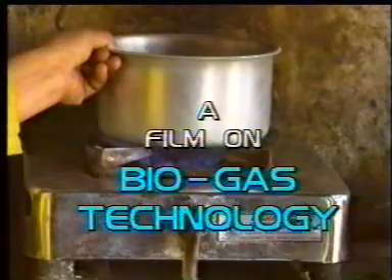With the rapid increase in population, there is a tremendous increase in the demand of energy resources to meet household needs in Indian villages. Still, about 60% of rural people depend upon traditional sources of energy, that is firewood, cow dung cakes, etc.

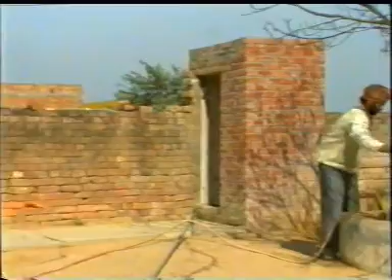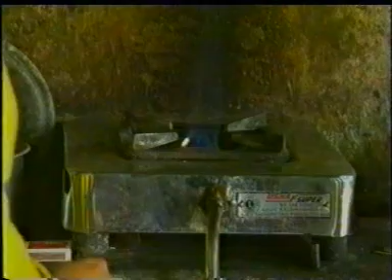Keeping in view the difficulties faced especially by rural women in meeting their energy demands, biogas technology can be an appropriate answer. Biogas technology helps us to generate biogas from biomass, that is cow dung, crop residues, etc., which are available in abundance in the rural areas.

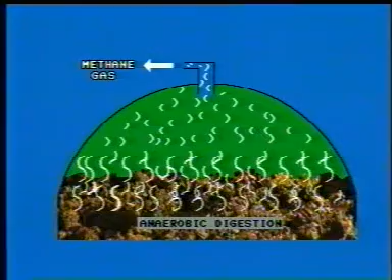Biogas is produced by anaerobic digestion. Anaerobic digestion is nothing but decomposition of cattle dung and other organic matters with the help of microorganisms in the absence of oxygen. Anaerobic digestion provides us methane gas for cooking, and in exchange of fresh-fed cow dung slurry in the plant, we get well-digested, valuable manure rich in nitrogen.

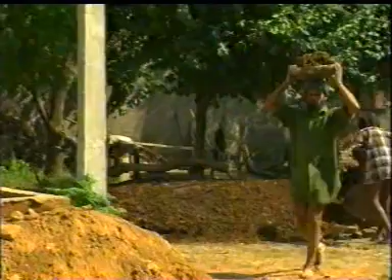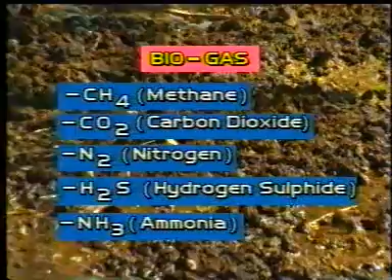What is biogas? Biogas is a mixture of methane, carbon dioxide, nitrogen, and some traces of gases like hydrogen sulfide, ammonia, and water vapor. Biogas can be utilized for cooking and lighting, running diesel pump sets, and the outcoming slurry as manure in the fields.

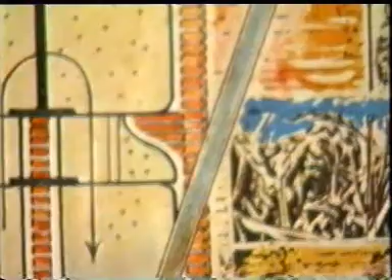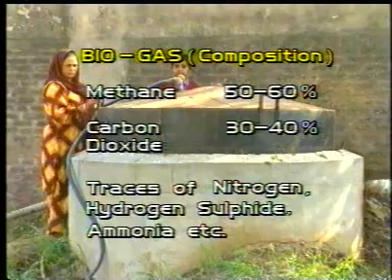On an average, biogas contains about 50 to 60% methane, 30 to 40% of carbon dioxide, and traces of nitrogen, hydrogen sulfide, and ammonia. The digestion of organic matters can be done in two ways: batch digestion or semi-wet process, and continuous or wet process.

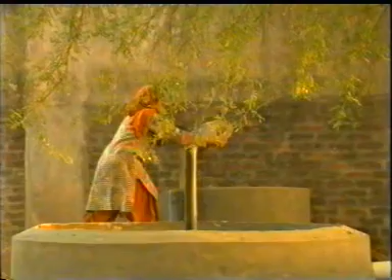Batch digestion. In the batch digestion process, the organic matters are filled in a suitable container along with some moisture. This container is then sealed to exclude air from it. The gas formation, which starts after 1 week, can be collected in centrally located gas holders and can be used for 30 to 40 days.

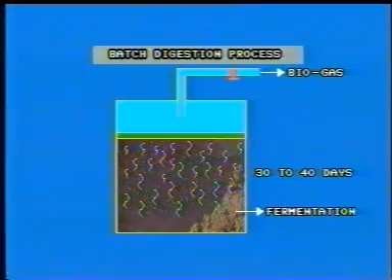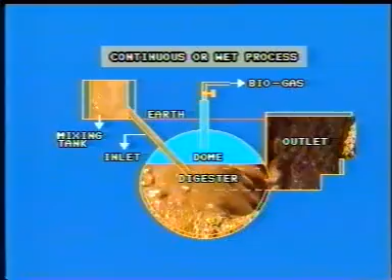Continuous process. In the continuous process, a single container serves as the digester. Each day, we add a required amount of fresh feed or slurry, and an equal amount of digested slurry comes out. It provides us gas continuously, and on the same principle, the biogas plants work.

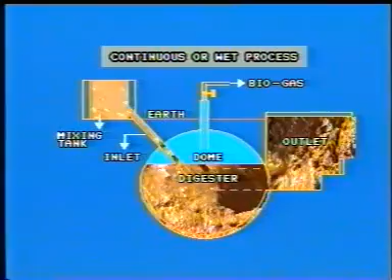Let us understand now what are the different factors that affect biodigestion: pH or hydrogen ion concentration, temperature, total solid content of the feed material, carbon-nitrogen ratio of the input material, retention time or rate of feeding, types of feedstock, stirring or agitation or mixing of the content of the digester, type of initial inoculum, and acid accumulation inside the digester. Now let us understand these factors one by one.

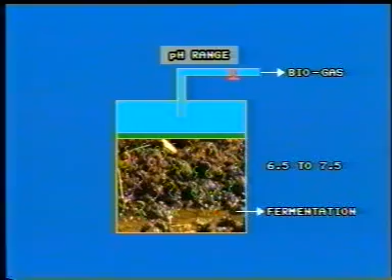pH or hydrogen ion concentration. The digester is usually buffered if the pH is maintained between 6.5 and 7.5. In this pH range, the microorganisms will be very active and biodigestion will be efficient. Temperature. The required temperature inside the digester for effective growth of microorganisms and biogas production is 20 degrees centigrade to 42 degrees centigrade.

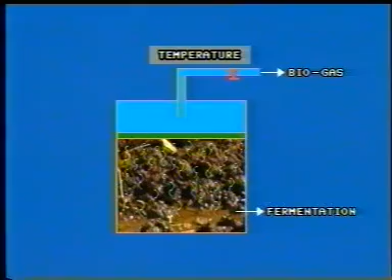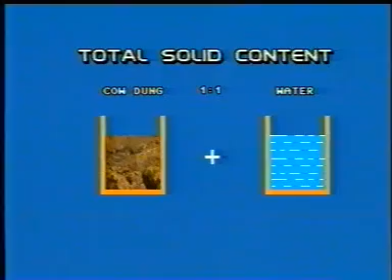Total solid content of the feed material. The cow dung is mixed with water, usually in the proportion of 1:1 by weight, to keep the total solid content about 8 to 10%. Carbon-nitrogen ratio of the input material. The optimum carbon-nitrogen ratio is 30:1 for the maximum microbial activity.

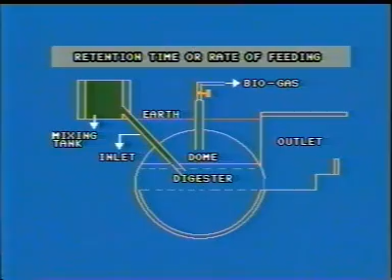Retention time or rate of feeding. The period of retention of organic matters inside the digester for complete digestion by the microorganisms is known as retention period. Retention periods for some of the feed materials are: cow and buffalo dung 50 days, night soil 30 days, pig dung 20 days, poultry droppings 20 days.

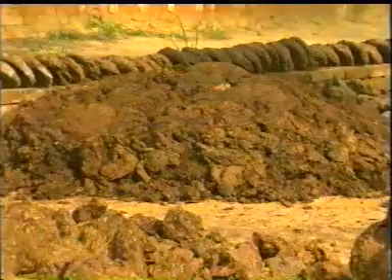Type of feedstock. All plant and animal wastes can form the feedstock for a digester. However, woody materials are avoided to keep the process of digestion smooth. Stirring or agitation or mixing. Breaking the scum or the mat formation at the top of the digester is necessary for enhancing gas generation.

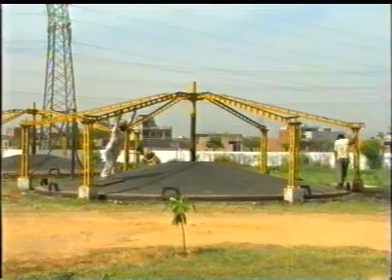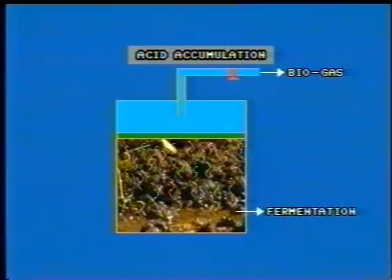Types of initial inoculum. The initial inoculum is the biodigested slurry collected from a well-established digester. It helps in providing sufficient number of microorganisms. Acid accumulation inside the digester. Some fresh plant matters added in excess may produce acids as intermediate products. Avoid adding excess fresh plant matters inside the digester.

Some of the family size biogas plants are the floating gas holder, commonly called KVIC type, with 1 to 10 cubic meter capacity, and the fixed dome, commonly called Janata type biogas plant, with 1 to 6 cubic meter capacity.

Pragati model with 1 to 8 cubic meter capacity. Modified fixed dome called Deenbandhu model with 1 to 6 cubic meter capacity. The KVIC plant has a digester made of prefabricated ferro cement. The KVIC plant also has a gas holder made of fiberglass reinforced plastic with a 1 to 6 cubic meter capacity.

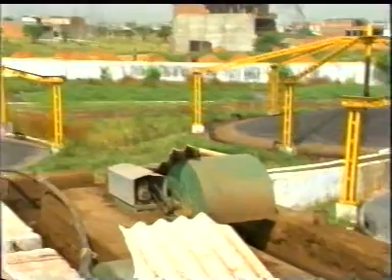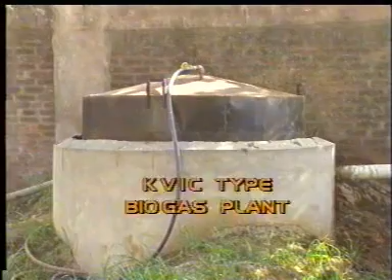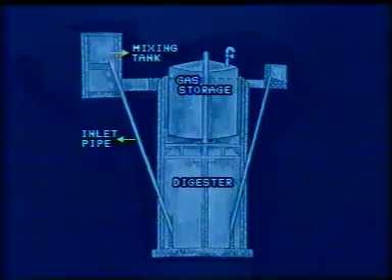Flexi biogas plant with 1 to 6 cubic meter capacity, which is portable and made of rubber. Apart from this, the community-size biogas plants can be useful for a bigger community. Now let us understand the function and construction techniques of KVIC biogas plants. The KVIC or Khadi and Village Industries Commission type biogas plant consists of a mixing tank, an inlet pipe, digester, gas storage, center guide frame, outlet pipe, and an outlet chamber.

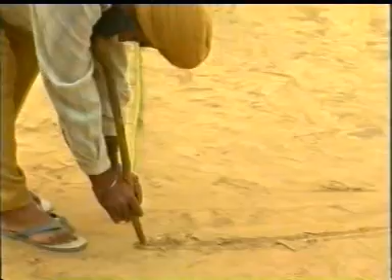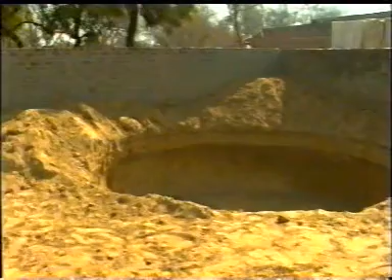Before the construction, we select a right place for the installation of biogas plant. Firstly, mark a line on the ground for digging a pit as per the size of the digester. For a 6 cubic meter capacity digester, we dig a pit of 10 feet diameter up to 8 to 10 feet depth. In order to lay a strong foundation, we do ramming of the brickbats with soil.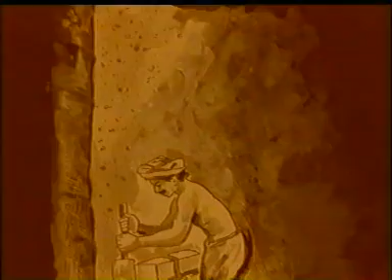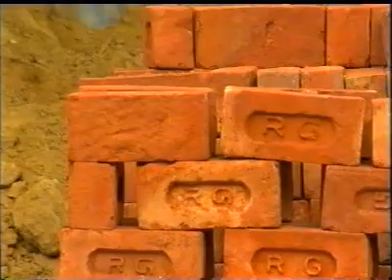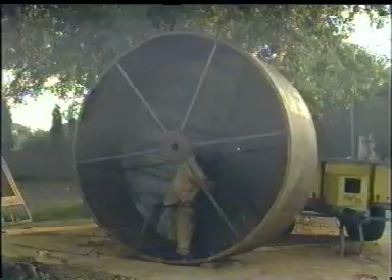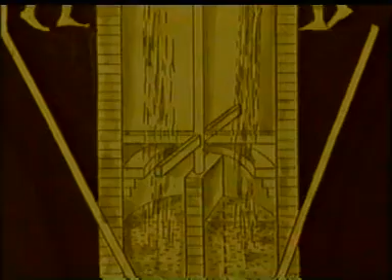The materials required are bricks, sand, stone chips, cement, and pipe for the construction of a digester, and we fix the center guide frame. An inlet and outlet chamber is constructed. The fabrication of steel gas holder is done separately by a mechanic. Initial feeding with fresh cow dung slurry with some digested slurry is done before fixing the gas holder into the biogas plant. We have here the views of a KVIC biogas plant user.

We are using biogas for cooking all items like chapati, dal, vegetable, milk, tea, etc. It is more useful than LPG. There is no danger in using this gas. The outcoming slurry is also used as good manure in the fields.

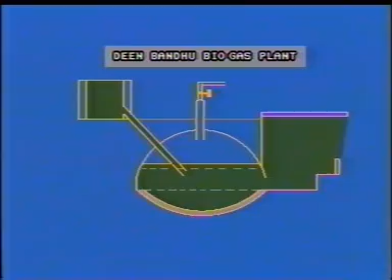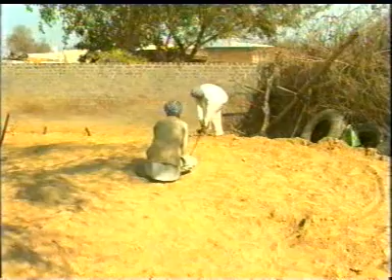Now let us understand the function and construction techniques of a Deenbandhu type biogas plant. Deenbandhu type biogas plant consists of a mixing tank, an inlet pipe, digester made of bricks, dome, and an outlet chamber. The digester cum dome is covered under the earth for its protection and to maintain temperature. Now for the techniques of its construction. First, we select an appropriate site and mark a line on the ground for digging a pit as per the size of the digester.

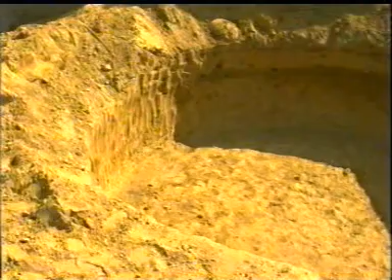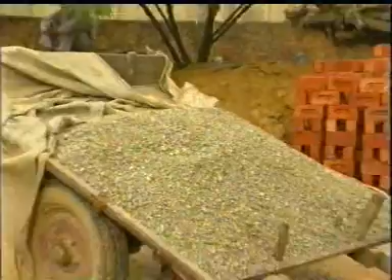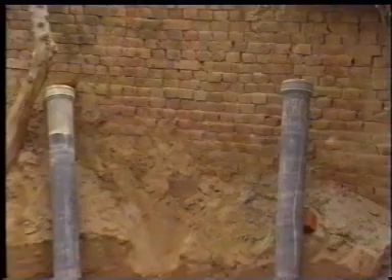Materials required for the construction are bricks, sand, stone chips, cement, and pipe. In order to lay a strong foundation, we do ramming of the brick bats of 4 to 5 inches depth. Further, we prepare mortar in the ratio cement 1 part, sand 2 parts, and stone chips 4 parts.

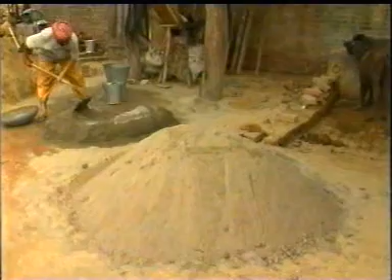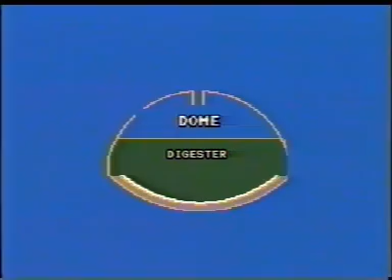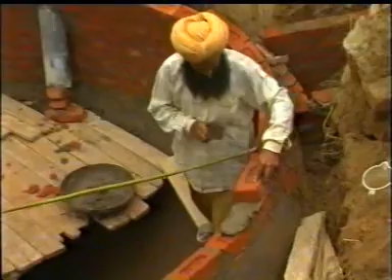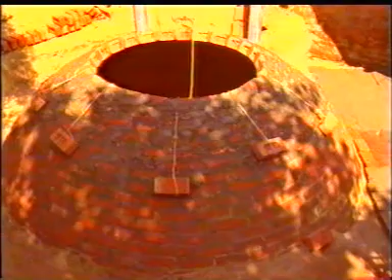Above the rammed foundation of a digester, a 3-inch layer of mortar is applied to stop any type of seepage. The digester is then constructed with bricks and it continues up to the dome. An outlet tank is also constructed along with the digester. In order to keep the radius equal, all along the digester cum dome, we use a measuring stick. After a certain height, we put counterweights with hooks in order to give support to the arc-shaped wall for better stabilization.

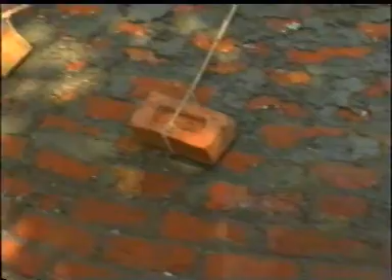We have the views of an expert about its construction. In the lower part of the dome, we use mortar of sand and cement in 5:1 ratio, which is gradually reduced to 4:1 and even up to 2:1 at the top of the dome. We use full-size bricks in the construction up to half the dome. As we go towards the upper part of the dome construction, gradually we use 3/4, half and even quarter size of the bricks as the circumference of the dome reduces.

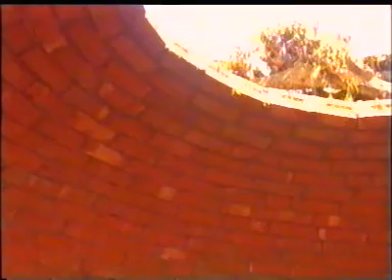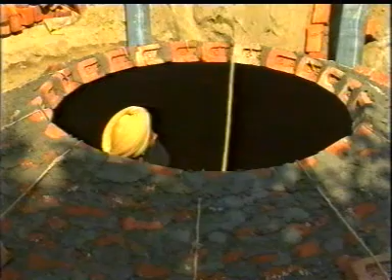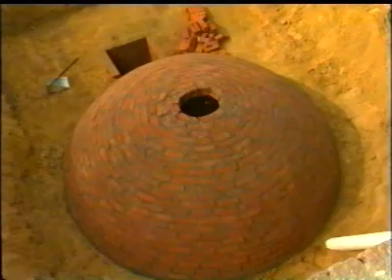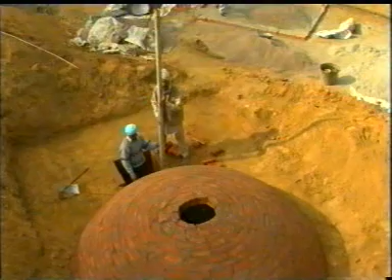We have a view of the dome from inside. The radius is always kept constant by regular measurement. Thus, the dome is constructed. Here, we can observe the different size of bricks laid at the top in different layers. At the top, a template or shuttering is done and a gas outlet pipe is fixed with concrete.

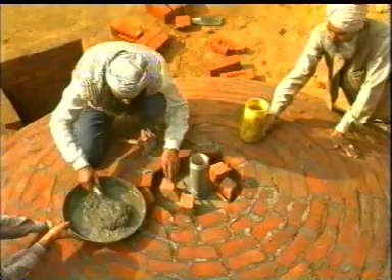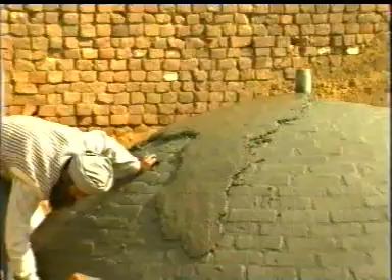After the completion of the dome construction, we apply slurry of cement in order to fill up the gaps or any hole. Then, a 1-inch concrete layer is applied over the dome. Similarly, a 1-inch layer of concrete is applied to the inner surface of the dome.

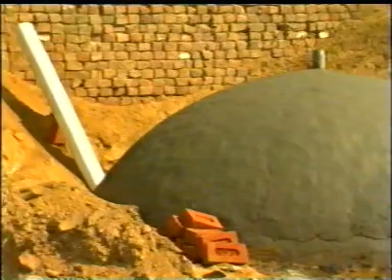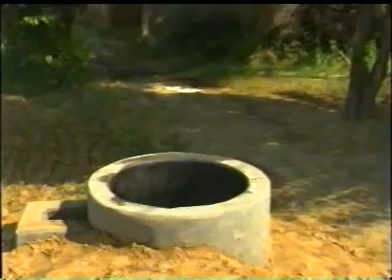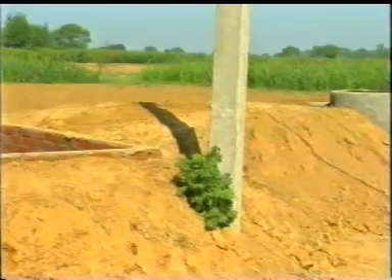The full constructed biogas plant is covered under the soil for its protection from the heat and cold. Now, a pipeline connection is given up to the kitchen.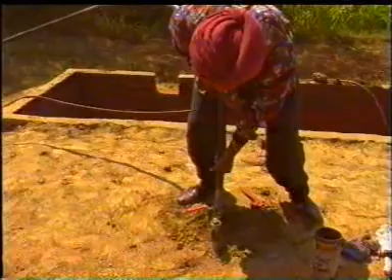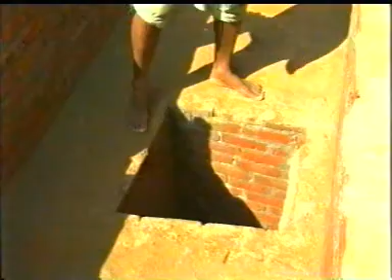The plant is ready for initial feeding. Initial feeding is done through an outlet chamber. Here, we see a local technique of initial feeding with the help of wooden shutters.

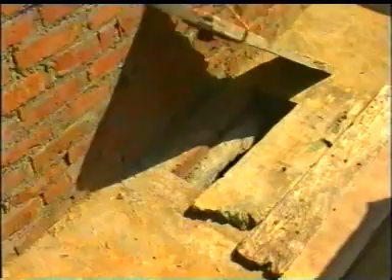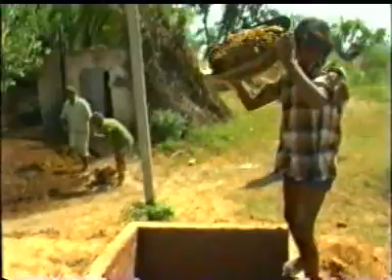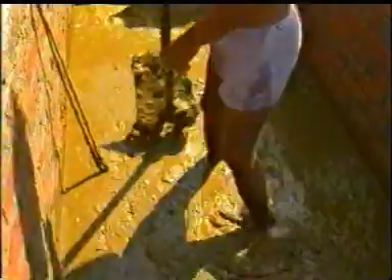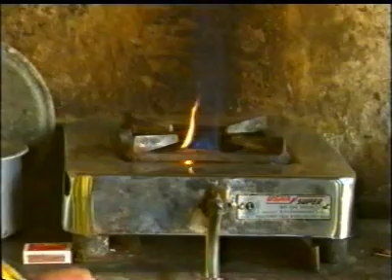A bulk amount of cow dung mixed in equal proportion with water is fed from the outlet chamber. Within a week of initial feeding, regular gas production starts. Let us have the opinion of a user of the Deenbandhu type biogas plant.

My name is Gursev Kaur. I belong to village Benra. We have been using a biogas plant for the last 4 to 5 years. It is very useful for us. All our cooking is done on the biogas.

Only in December and January, we require to use 1 cylinder of LPG, otherwise we use biogas for the whole year. Chapatis for 10 to 15 people can be prepared within an hour. It is very cheap and useful. It is very safe. There is a chance of an LPG cylinder bursting, but not in this.

Now let us have some more views from the experts on biogas plant. Biogas plant has a very simple technology. There is no problem in understanding the repair and maintenance of a biogas plant even for a layman.

When we install a biogas plant, we provide a complete guideline and booklet to the beneficiary. We keep a follow-up to check the performance of newly installed biogas plants.

The main point is to feed the biogas plant with the cow dung slurry daily in required proportions. There should be no gap in feeding the plant, otherwise the biogas production will be reduced.